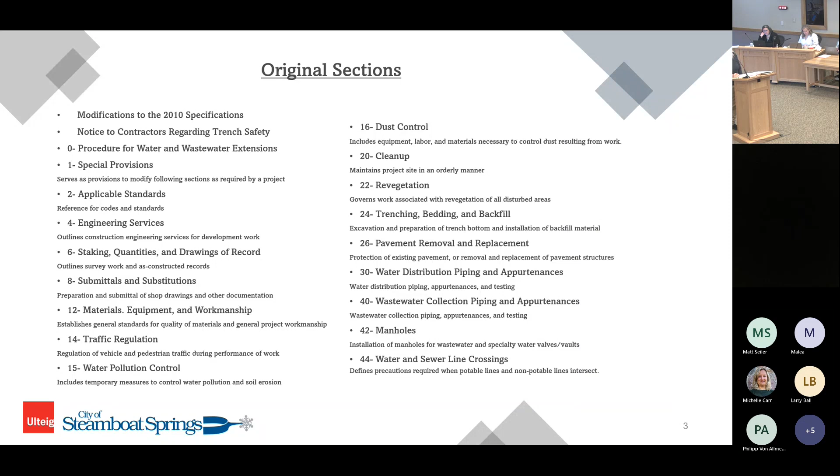So in an overall view, we've created in section 3 definitions, abbreviations, and approved products. So when somebody just asked, and I forget who that was, about what kind of fire hydrant or those kind of things, that's where you should go to make sure they're still the same, or if you see that changing, that's where you can look for that.

We've taken out some sections because they were included in the Public Works engineering standards, and we want to have one place to make those modifications. It'll be clearer, they'll be the same.

And so instead of having traffic regulations, water pollution control, dust control, revegetation, and pavement removal in here, we refer you off to the right section so that you're following one set of standards instead of multiple sets of standards if those ever diverged or changed. So be aware of that.

And then we've gone in and added four new sections. On top of that, 32 is backflow prevention, so there's a section on that, we'll talk about that a little more. 46, pre-treatment under the sewer part. 47, lift stations, and 48, lining of sewer pipe.

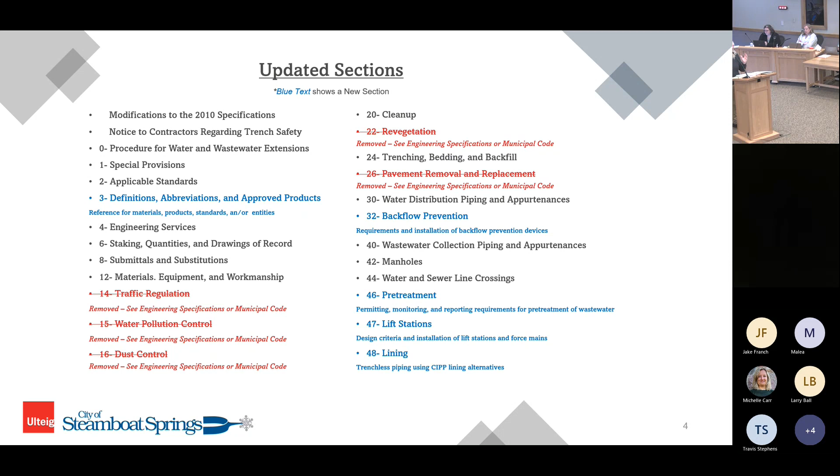So we're keeping basically the same, we'll go through each section so you can see the overall changes, but those are the big restructuring of this thing. And again, when it's finished, the numbering is going to change a little bit, so you'll see that, but at least now you can compare to what's changing in this today, okay?

And then just to hit some major points, we put on here, I want to hit a couple that aren't up there first. I think the importance of one, there were issues, I think, in the fall last year with some folks turning water valves and dealing with some of the water systems in the city.

We've strengthened the language here to really make sure the city is the one operating any part of the water system before it's online. The importance of that is there was time wasted when the state gets involved, and there can be potential problems with the existing line and water that you have to go through quite a process to deal with. So even though everybody knows how to operate a water valve generally, it's not acceptable here to do that - it has to come from the city. I'm bringing this up because we spent a lot of time talking about it, since it was happening right when we were doing this, and we want to make sure there's an understanding of why that's happening and how important it is to the city.

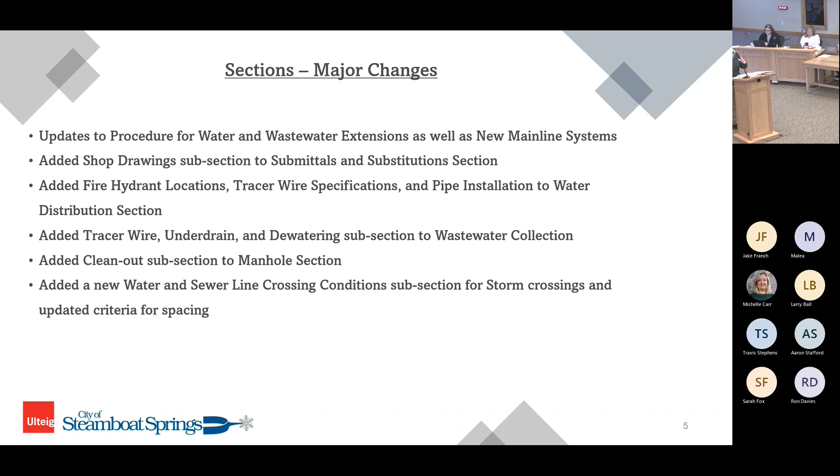We've added a shop drawings section so we know the process we're going to use for shop drawings. We've added procedures for how things get submitted, what's on the plans, checklists, and things like that. We've also added cleanouts and all those other sections I talked about. So there's quite a bit - I'm going to go through those in more detail, but I wanted to give you a sense overall of some of the things that are really important to us.

On the next slide, again, we've removed traffic regulation, water pollution, dust control, revegetation, and pavement removal, and added the ones I talked about before. So you can see the standards themselves are actually beefed up a little more than what you've seen in the past. It will take some time for everybody, once these are out, to get used to that change, so we recommend a lot of reading and review of this, and we appreciate comments.

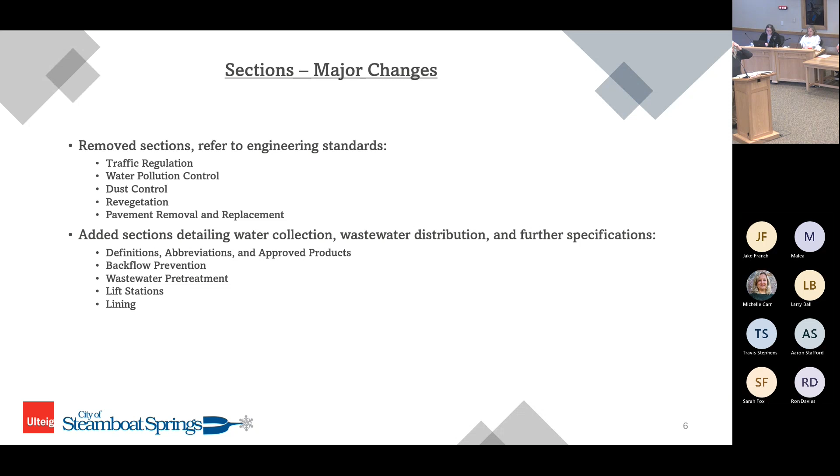So we'll go to section 0. Again, we've added - I don't want to go into too much detail - the process and a little more information about what we expect on construction drawings, what that looks like, how that works, and making sure that when the city is doing review of that, we're getting what we need. That actually saves all of you time and money, because if you have direct and specific information that's up to date with what the city needs, everybody's on the same page, and we shouldn't have as many issues with that.

We've updated quite a bit of the acceptance process, including final acceptance, and I think that should be clearer. One of the things I know is important to the city is that the consulting engineers are generally doing a lot of work in the field to make sure things are done in place. The city really needs all the consulting engineers - I don't know if there's any here today or not - to really do what the specifications ask for, to review, process, and approve things, and make recommendations the way the specifications are asking for. By defining that better here, we're going to get a better product.

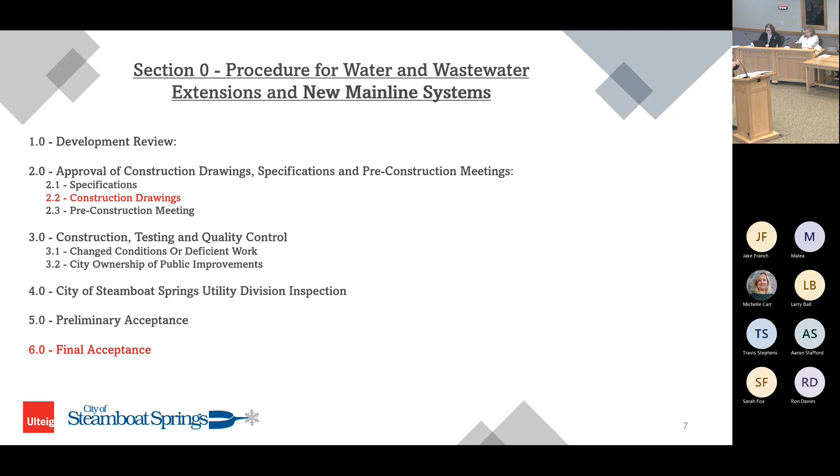So we're looking for the consulting engineers to really have a good handle on what's required out there and make those things happen the way they're supposed to, so that we're saving time. And so we think this will define that better.

So if we could move to section 1. I've already mentioned under part 3 there, the operation of the valves is strictly prohibited in these specifications. The second part is removal, and then we direct you to where those sections are, so nobody has to go searching to find exactly where you're going.

So that's pretty straightforward. There's not anything new on section 2. It just describes applicable standards and other things that relate to these specifications that we have here.

In section 3, I just highlight that the approved product list is really important, and that will most likely be a continuous update as time goes on, as things change.

For consistency, the city needs certain manufacturers so that they can do maintenance and updates and all those kinds of things, and they don't have to hold all that different product all over the place. So that's something you should look at for sure.

We put definitions in there in one place instead of spread all over the place, so that there's consistency of what those definitions are and everybody's clear on that. So that's section 3. If we go to section 4,

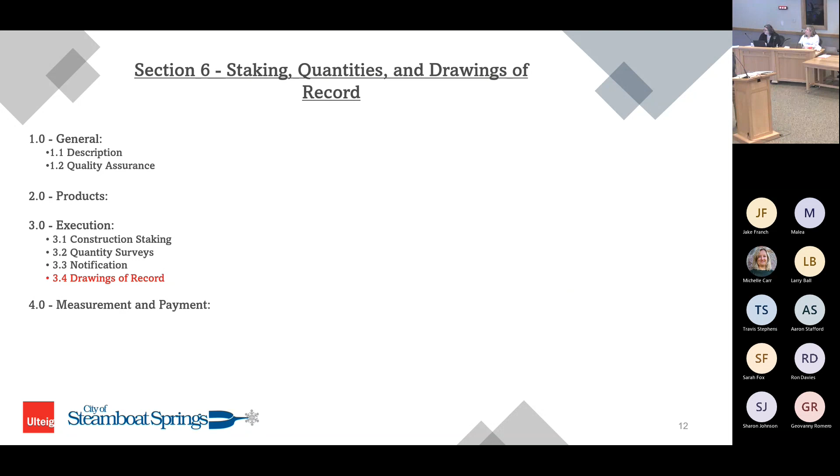Section 8 is really more about submittals and the timing of the submittal related to shop drawings, related to substitution of materials. And if you run into something that you have a problem with, this is the section to take a look at.

I'm going to stop here and ask, are there any questions about 0 to 8? I've kind of hit a bunch of them. I want to make sure that I'm not losing anybody, or if you have questions in general about those. Any questions? Any thoughts? Anything you need more of?

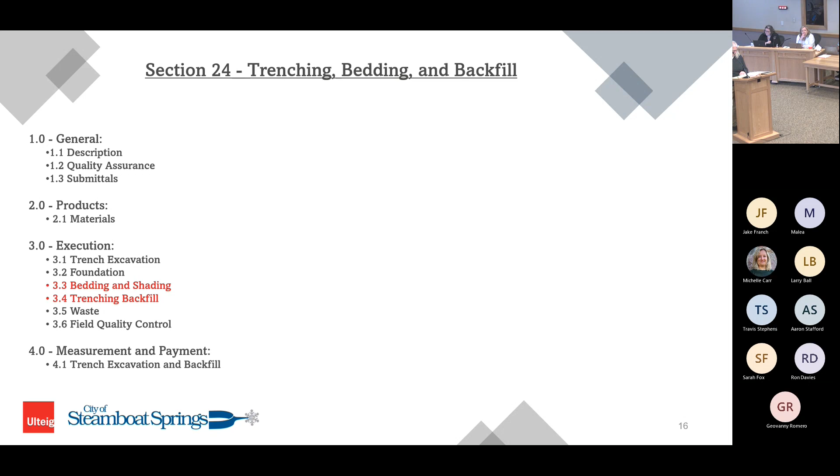Now we're to section 30 on water distribution, piping, and appurtenances. I think one of the biggest things is we talked a lot about thrust blocks, and instead of pouring those in the field, we're going to look at precast thrust blocks from here on. Instead of leaving so much concrete in the hole—and I'm not speaking from experience doing construction at Steamboat—but a lot of times it's too much, causes all kinds of issues, and doesn't get done right. We think a precast thrust block will make for a cleaner site and make it easier in the future to move. So we spent time working on that and evaluating it to make sure it can work here, and that is part of the change.

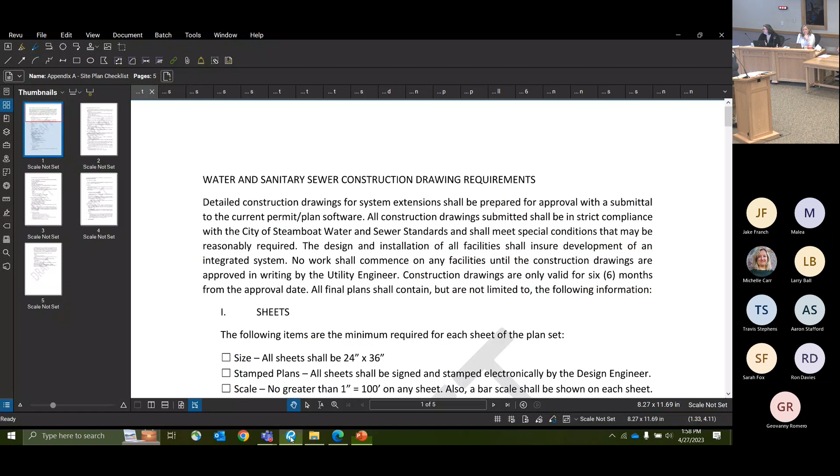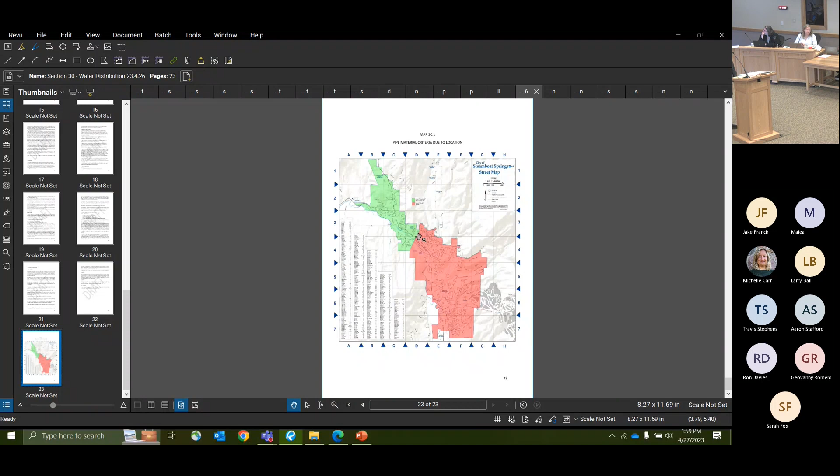We've also put a map in the standards to show pipe material, because around 12th Street there's a change in the materials used in the ground—PVC in some places and ductile iron pipe in others. So we've created a map so everybody can tell where that's at, and that will be in the specifications for clarity so everyone knows where they should be using certain types of pipe.

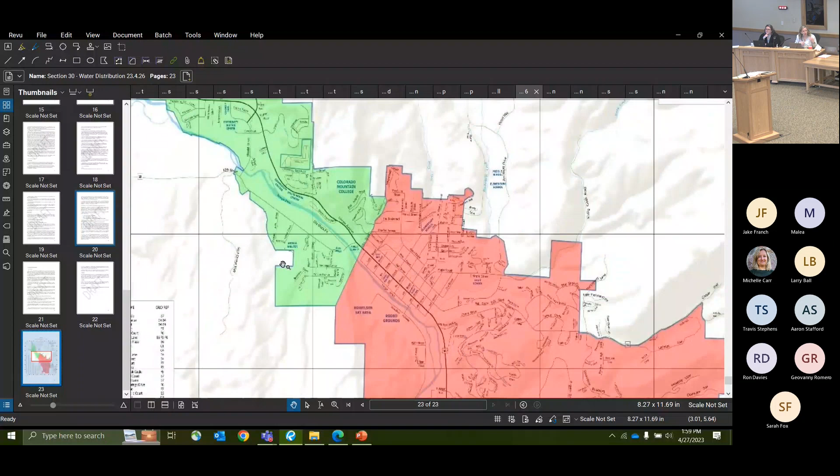And just to be clear, that's due to soil conditions. We see hotter soils on the western side of town for some reason, but not so bad in town. All right, that will go to section 32.

Any thought to plastic pipe throughout the district or plastic service lines? There has been. We don't mind when you're talking plastic—are you talking like the pure core and everything, or C900 main lines in downtown? Personally I would love C900 in downtown, but we're not restricting anybody to just ductile from 12th east. We're specifying it has to be PVC from 12th west—there's not an option there. On the other side, for the city, you can use either; it's your preference, we're not going to steer you in any direction.

As far as water services go, I believe Rebecca will be discussing that, and Michelle's going to as well. That's definitely a big one, and something we are considering, but I don't have an answer for you yet. It's still something we're discussing. Thank you.

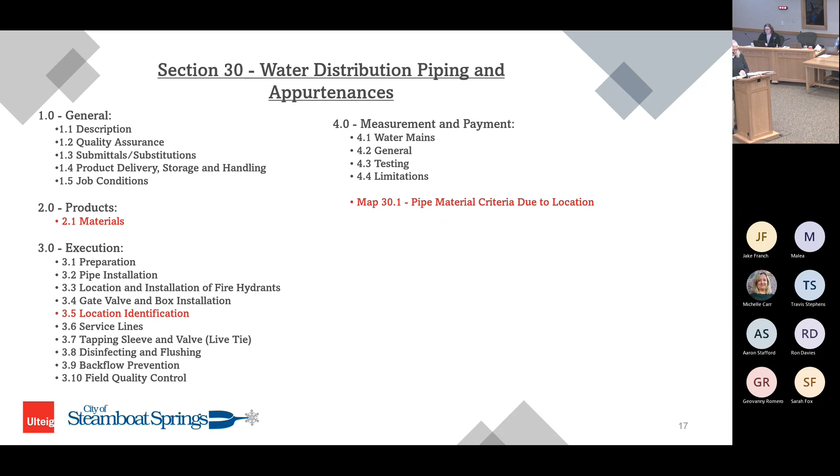Backflow prevention, we'll skip right to that. I assume nobody else had questions about 30. This was really to highlight what's happening with breweries coming in - there's issues with backflow prevention. My apologies, it's really just to have certified folks testing this: what's required to be put in, how's that look, what happens on an annual basis, who tracks that, and those requirements. This really lays that out, and it's based on state requirements, so it's consistent with what the state requires and what should be happening here in town. So we think it'll bring a consistency. It wasn't really addressed much at all in these standards before, so now we've identified that.

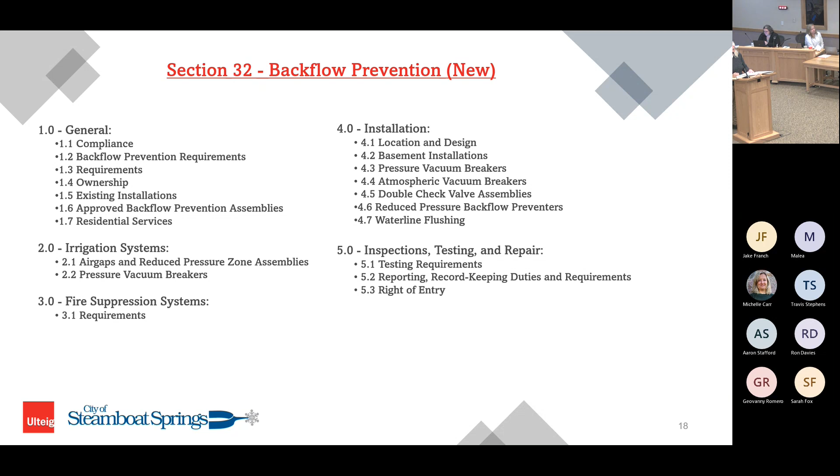Section 40 is an existing section from wastewater collection system. It highlights in here again the tracer wire and then the private systems and what's the expectation of that. In general, the section didn't change much beyond those two items. There were some modifications, but they weren't major changes we were focusing on.

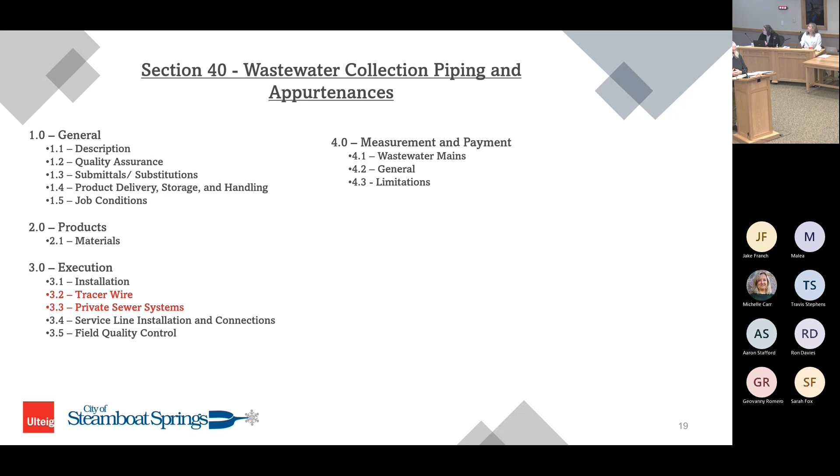On section 42 with manholes, we added a part for cleanouts so that's better defined in terms of what the expectation is on the cleanouts, where there's going to be, how that's going to look. We've also updated the details we'll show you in a bit related to the manholes in general, what's expected, what's going to be happening with those.

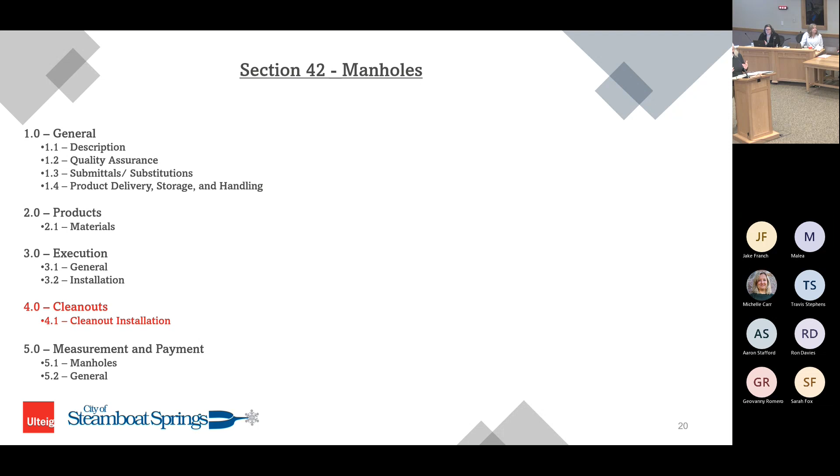Section 44 is water and sewer line crossing. I think the biggest thing, we always want to see a wider separation between water and sewer. Those of us that have done this a while, sometimes that's not possible. So we're starting with the expectation there is going to be a separation in there. And if it gets where it can't happen and the city says, yep, you're right, we can't do that separation, these are changed to manage that.

We've also added a section on requirements around storm drainage. So those have been updated and modified, I think, to fit with what's going on today.

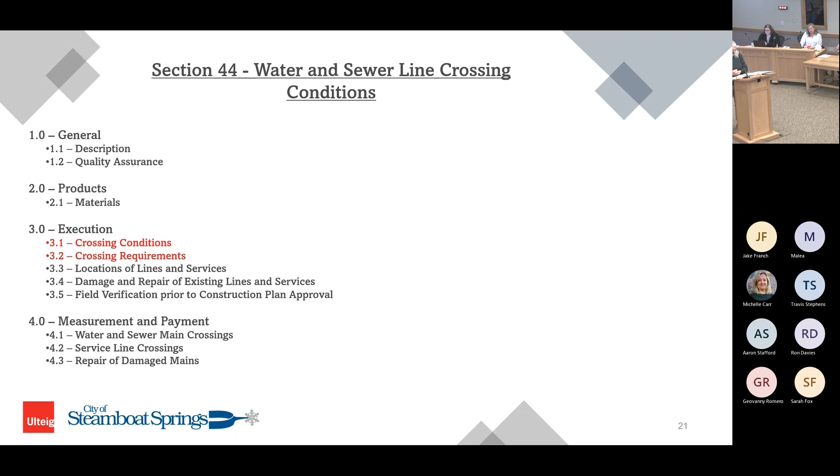The next section is wastewater pretreatment. We've put in here sand oil separator, grease interceptors, and then when you have a brewery, there's issues because when a brewery puts out, they hit the system with a lot of material and it really causes problems. So we've defined when pretreatment is required, what's required, and how that's going to look. So whenever there's industry that occurs here, this section will really have a lot of impact on that.

And we think it will improve what can happen in sewer treatment and with the maintenance of lines and not getting plugging. I've had experience where a brewery was pushing out so much material, we were getting plugging all the time and problems with that. So we think this will help resolve how that's going to look and what's going to go on with that.

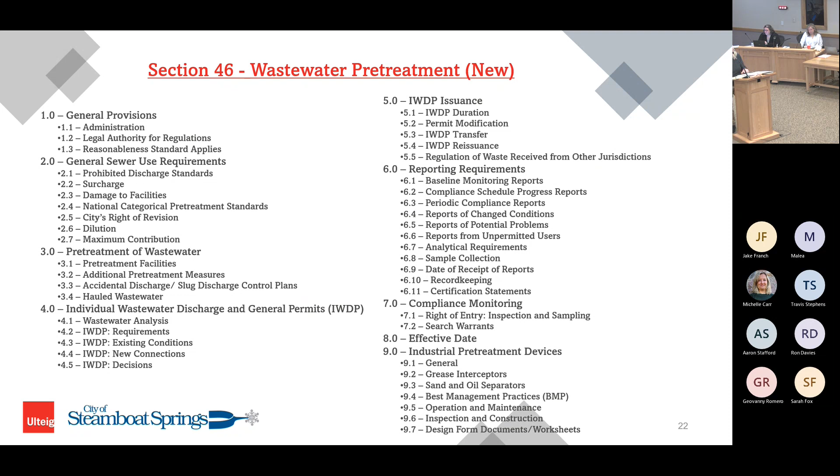The next section is lift stations and force mains. Of course, the city would rather not see lift stations if it can be done with gravity and put the lines out and make that happen. That's obviously the way that the city would like to see this go. But if not, then there's a defined process and defined requirements for what the lift station should look like and how those force mains should work.

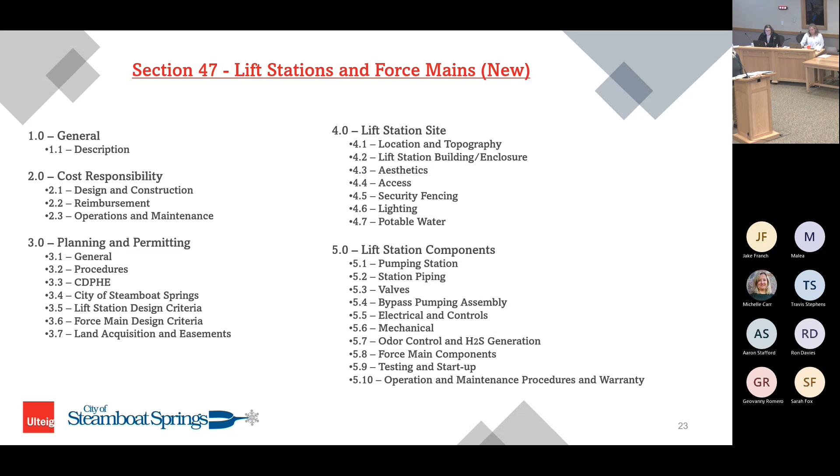So this is brand new, and again, for those of you who are designing, we would recommend that you take a look at that. The last section is section 48, which is lining of sewer pipes, and again, that's to help manage and deal with maintenance of systems that are out there for a while and starting to have problems.

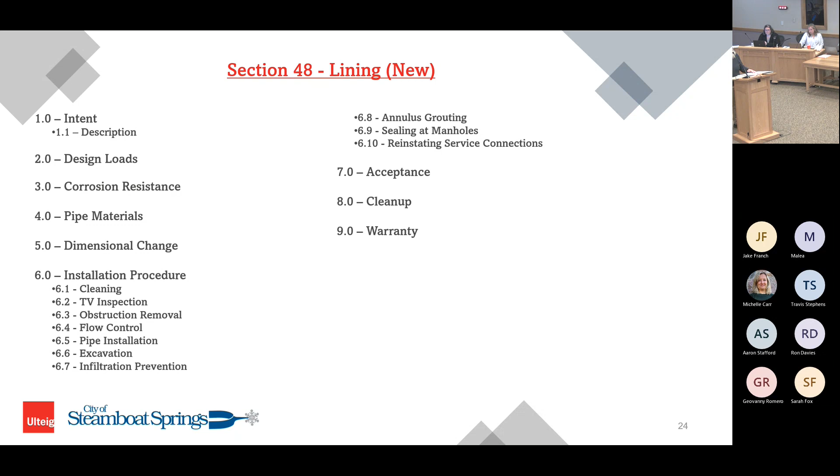In addition to those, if you go to the updated details, we've added quite a few details to the process here, and we've highlighted those in blue for your advantage to take a look at those and make sure you understand what we're looking for and what's happening with those standards. I'll take you through a couple of those.

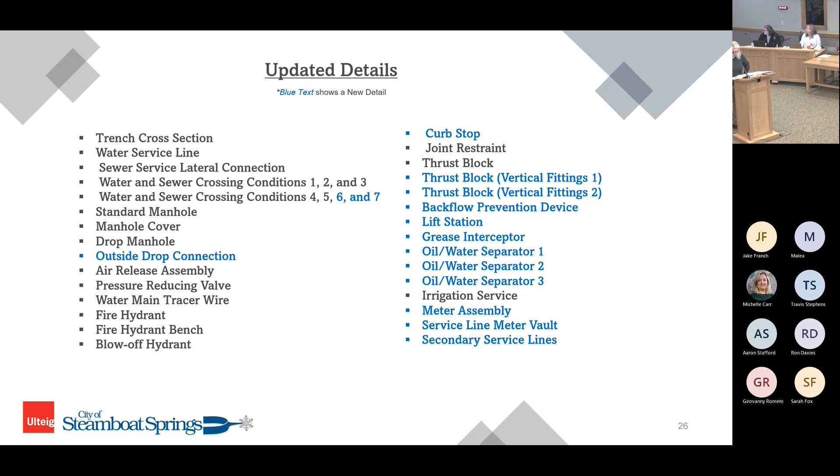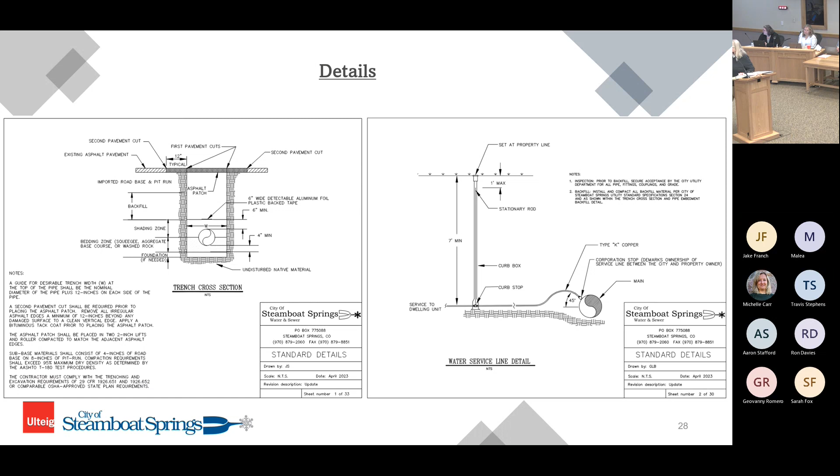Let's see, I'm going to skip a couple things. We're going to go to 29. I think these are the crossings. So those details have been updated and now reflect a little bit better as to what's happening and what the expectations are.

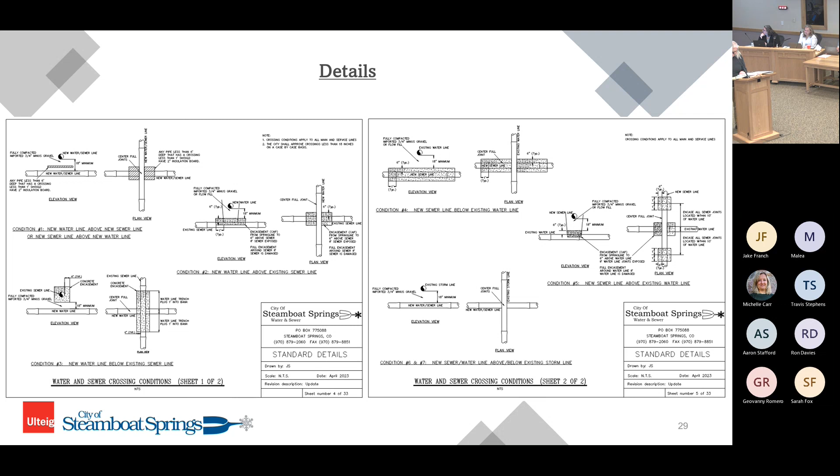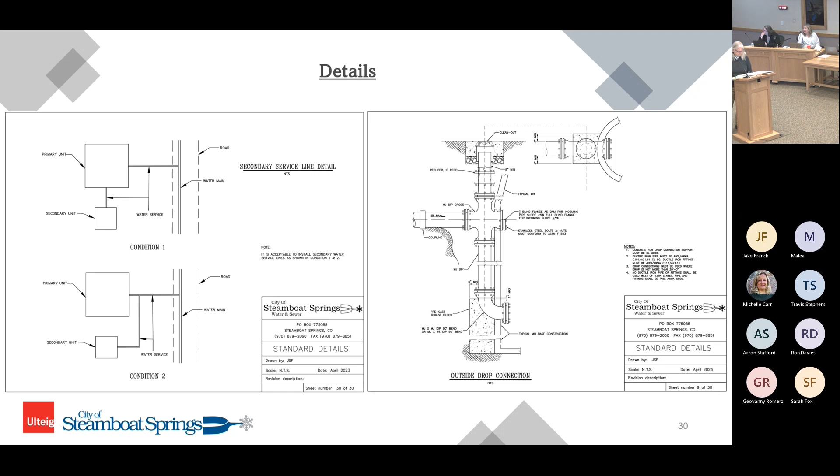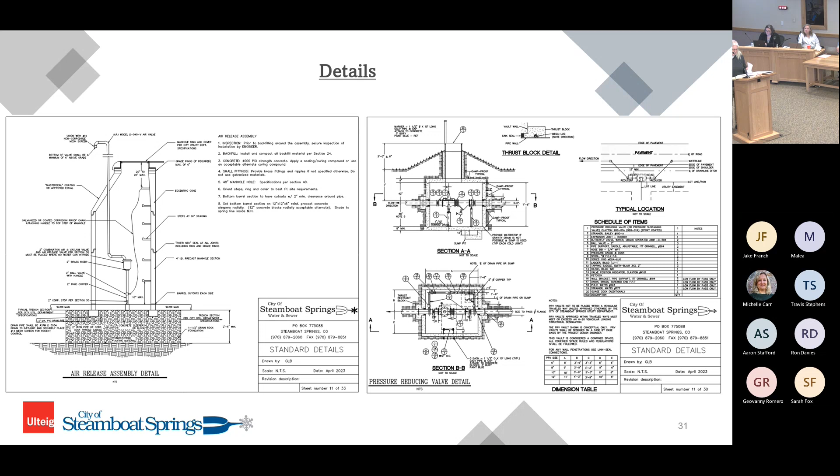We've added some information on air release valves and pressure reducing valves as well. Then I think somebody mentioned, we have our thrust block details on page 33. We'll look through that and make sure that we're not giving you conflicting information with the precast information that we've talked about today. I think those are great questions, and that's what we're here for.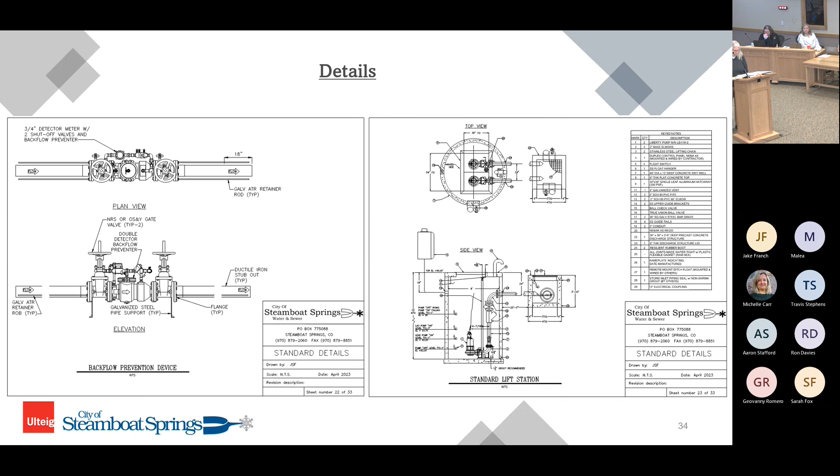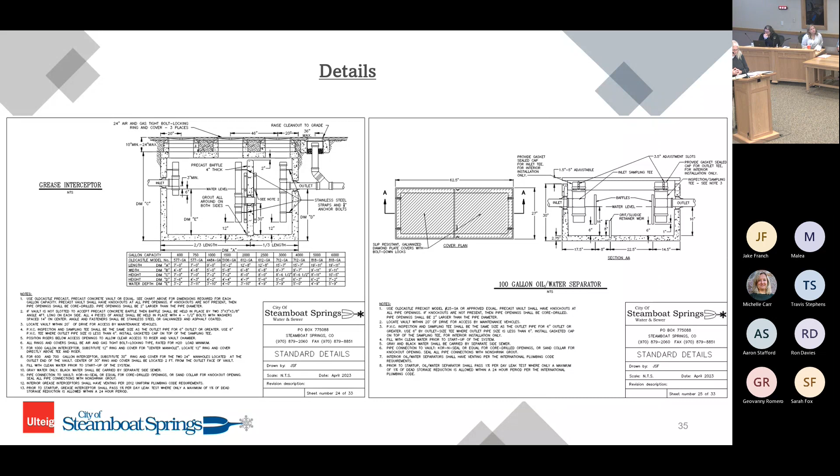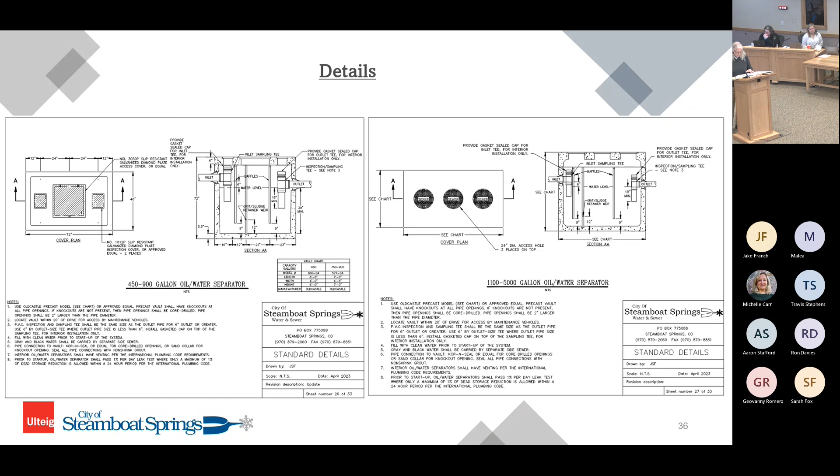And then we continue with oil/water separator, grease interceptor, details on what those requirements are, and then the process and expectations on the lift station. So those are our updates, and then we have our Appendix A, which is our requirements and checklists that we're going to have for all plans. We'll have a checklist so that you know what we're looking for on each one. That's a quick overview to make sure you know where we've spent our time. I'm looking to see if there's any other questions on this part.

That's Sam, we'll look at that. Okay, and see what's going on with that.